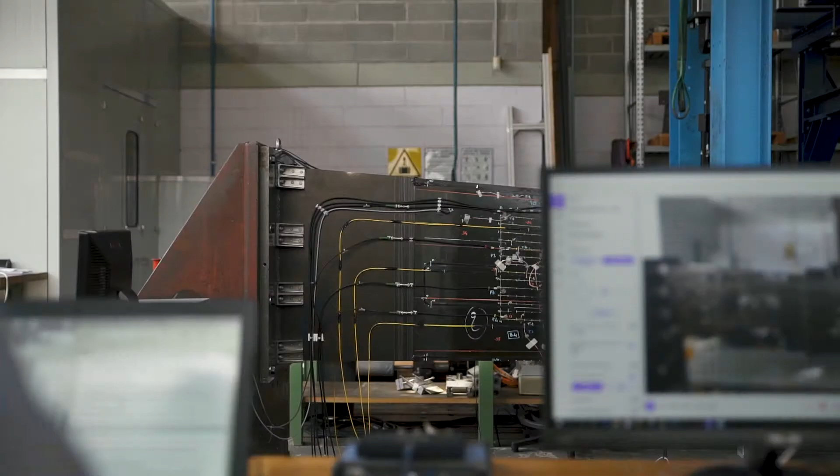SAMAS stands for SHM Application to Remotely Piloted Aircraft Systems, and it is aimed at the development and application of structural health monitoring methodologies with a particular focus on unmanned aerial vehicles. SAMAS is the third project in a row dedicated to SHM on aerial vehicles.

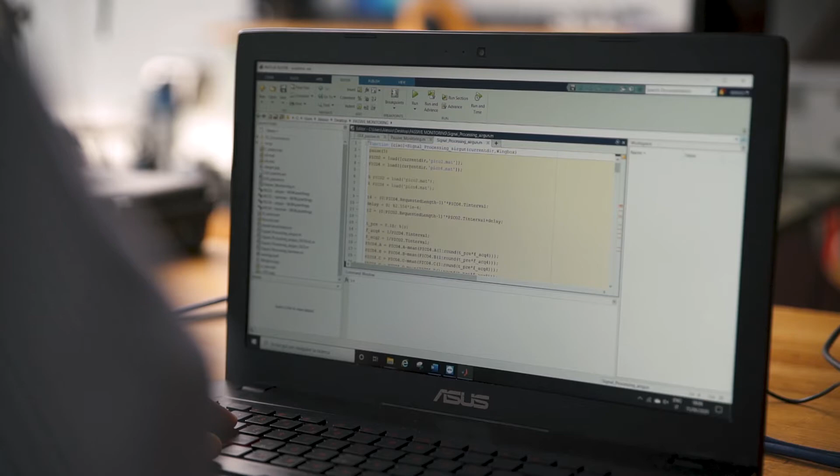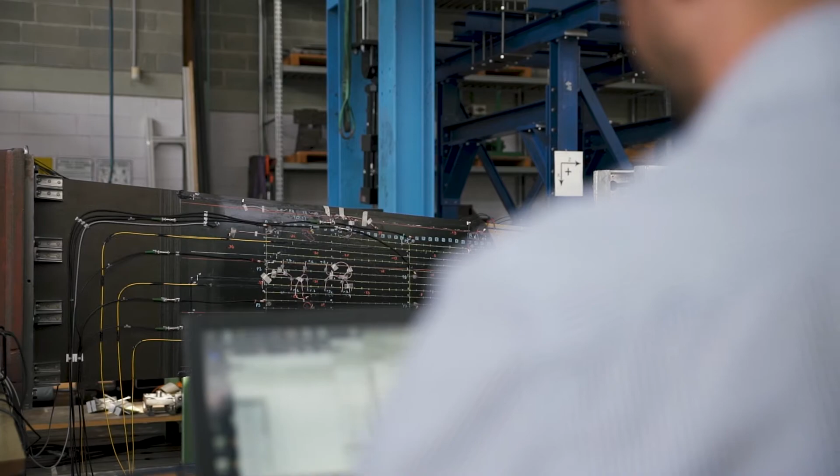Unmanned vehicles are one of the new realities our society and governments must care about. In fact, the European Commission asked for the development of technology enablers for the integration of the unmanned vehicle into non-segregated air traffic management. Among them, the development of SHM systems is a mandatory step.

The main objectives of the SAMAS project are, first of all, the realization of an efficient load monitoring system. The second point is the development of an impact monitoring system. And finally, the verification of SHM systems compliance with the currently available guidelines and recommendations, and the investigation of their beneficial effects on the vehicle life cycle cost through a cost-benefit analysis and a digital twin approach.

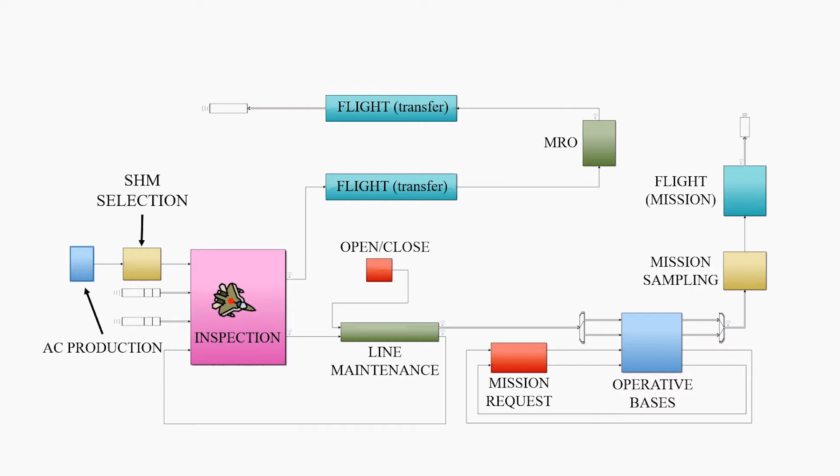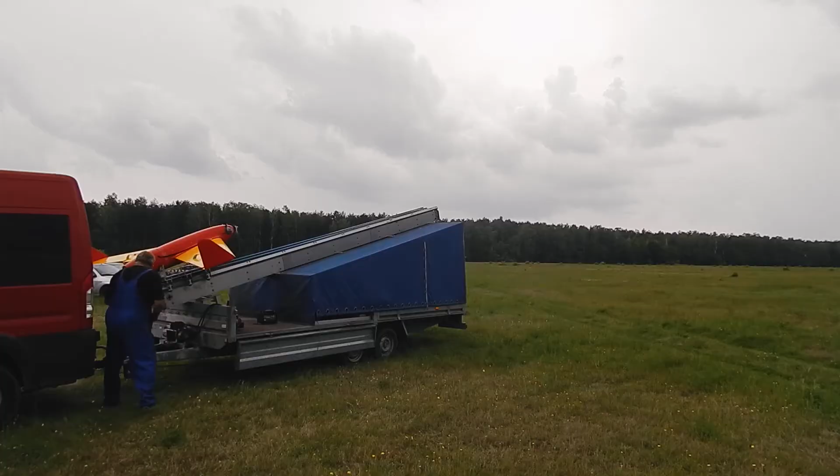At the end of the project, a demonstrator will show the operations of the load and impact monitoring systems, applying them to two structures or platforms. The first one is a carbon fiber wingbox portion in a laboratory environment. Then, a small-scale drone in a real environment executing flight tests.

An initial investigation was carried out to develop accurate and reliable virtual simulations. A mix between experimental tests and advanced nonlinear numerical models was used to calibrate and validate material models.

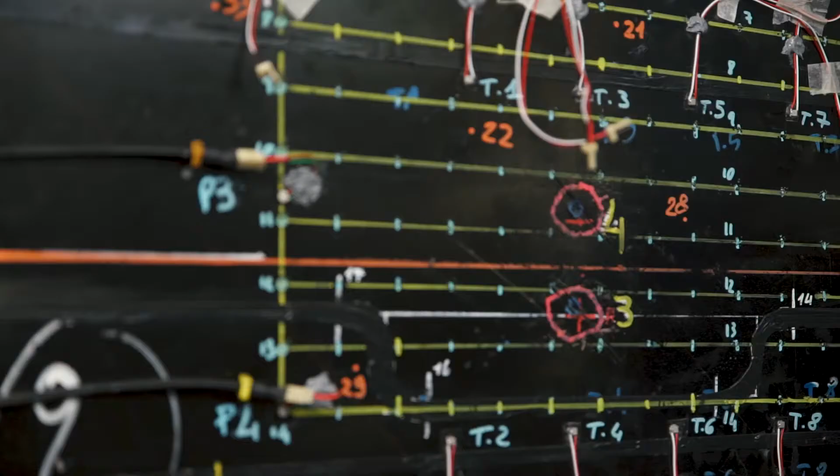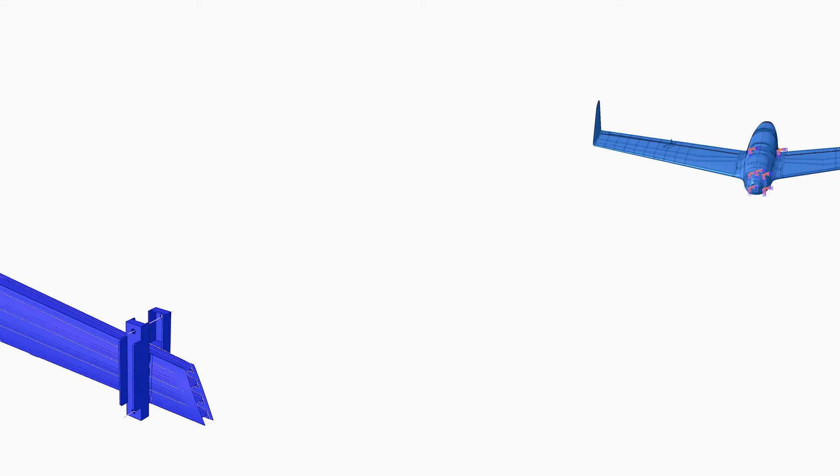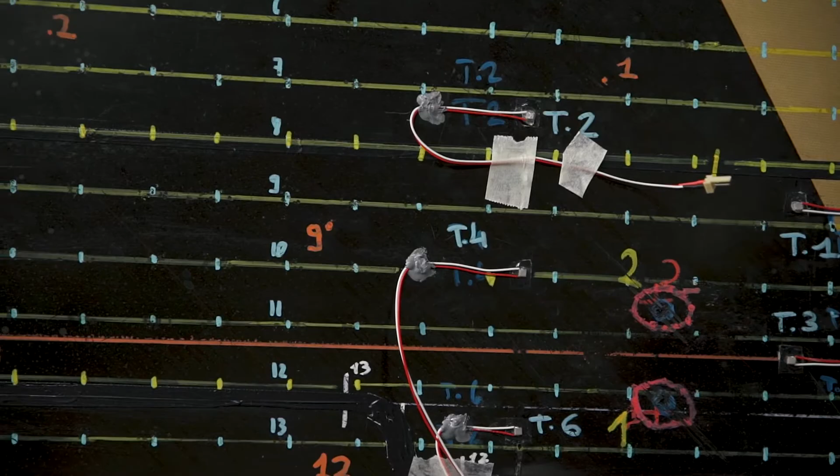The main objectives of the load monitoring system are life consumption estimation and maneuver recognition. These can be accomplished exploiting experimental measures and numerical models to provide an estimation of the aerodynamic loads and strain field during the flight. In fact, the two platforms were numerically modeled and the proper sensing technology was selected, choosing sensors based on optical sensing technologies for punctual and distributed strain measurements.

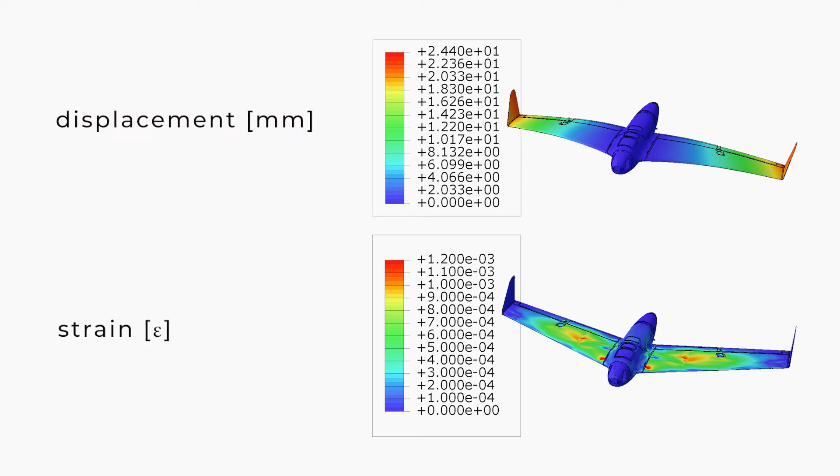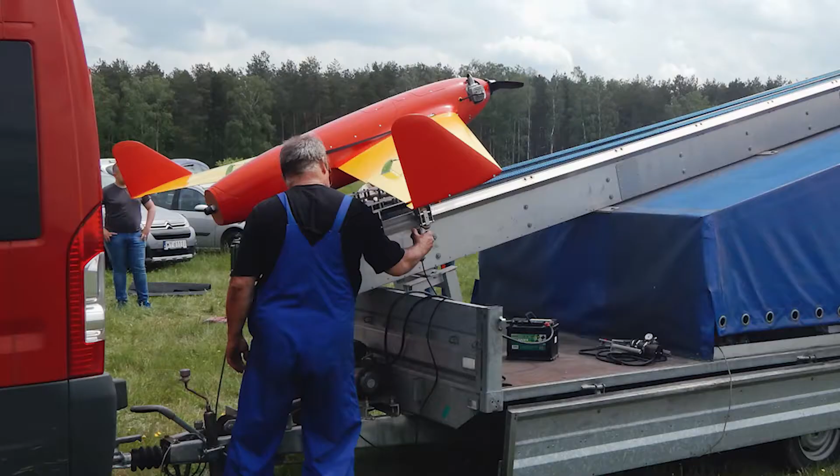The number and position of sensors and forces are defined through an optimization procedure. We studied the effect of static loads, engine vibrations, and temperature to obtain the best reconstruction performances. Finally, the sensors are installed on the real structure. The system operation is validated first in a controlled environment in our labs, then in a real environment through flight tests, acquiring data during the maneuvers with MIL-certified equipment mounted on board.

The system can reconstruct in real time a correct set of aerodynamic forces that induces in the structure a strain field coherent with the actual flying condition. The results are confirmed by strain gauges installed in specific validation positions and comparing the strain and displacement fields with those obtained with the computational fluid dynamic analysis.

The main objective of the impact monitoring system is to identify unexpected impacts and the related damages. A dual sensor network composed of piezoelectric elements and optical fibers acts in both a passive and active way to characterize the impact. We can divide the system into three parts: a passive impact monitoring, a numerical module, and finally an active damage monitoring.

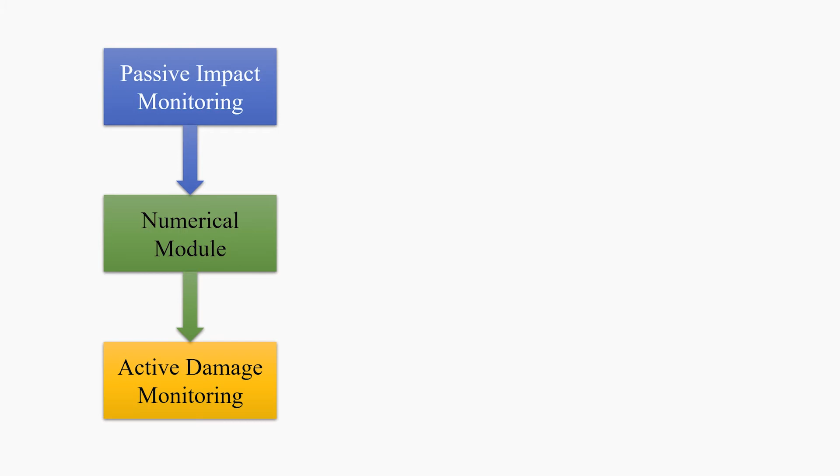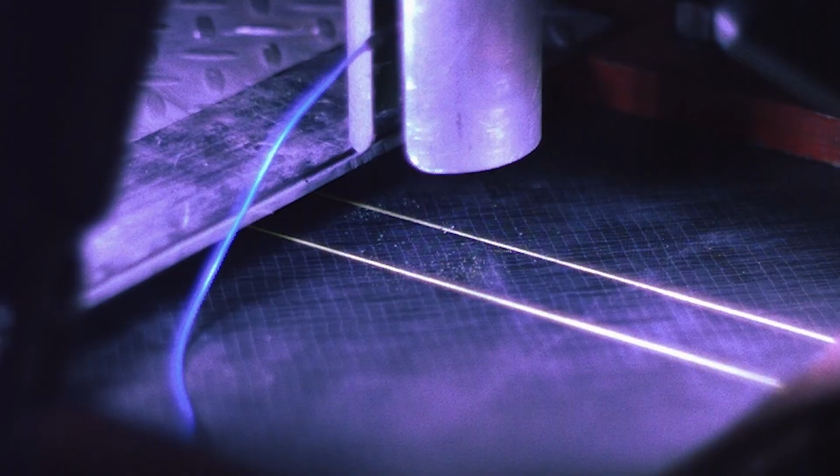An initial investigation was carried out to choose the sensor network optimal configuration, while the algorithms are trained with non-damaging impacts using a dynamometric hammer, then hitting the structure with falling masses, and finally shooting with projectiles. The damages are then measured with non-destructive techniques.

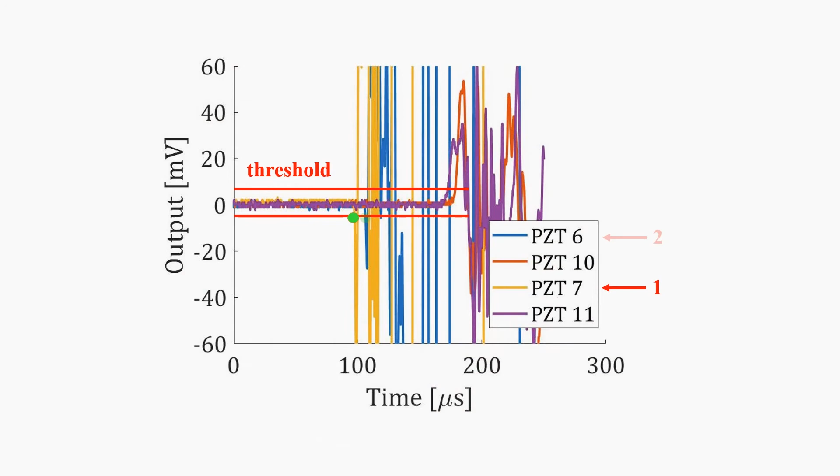The passive part detects, locates and reconstructs the impact force, exploiting data-driven techniques and genetic algorithms. The operation of the system is validated, comparing its result with the experimental information, showing its ability to fully characterize an impact event.

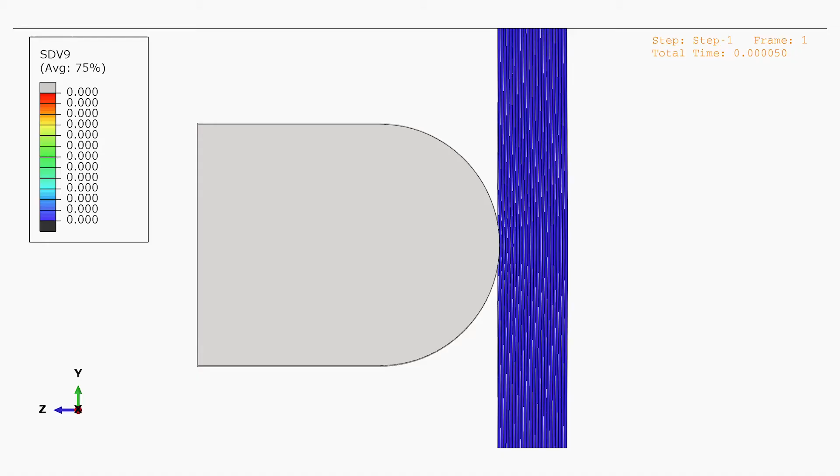Then, the numerical module gives an indication about the damage extension, leveraging on a building block approach for the simulation process to build a reliable and efficient virtual test environment that is able to mimic the behavior of the actual structure. The results are experimentally validated through a comparison with actual damage dimensions.

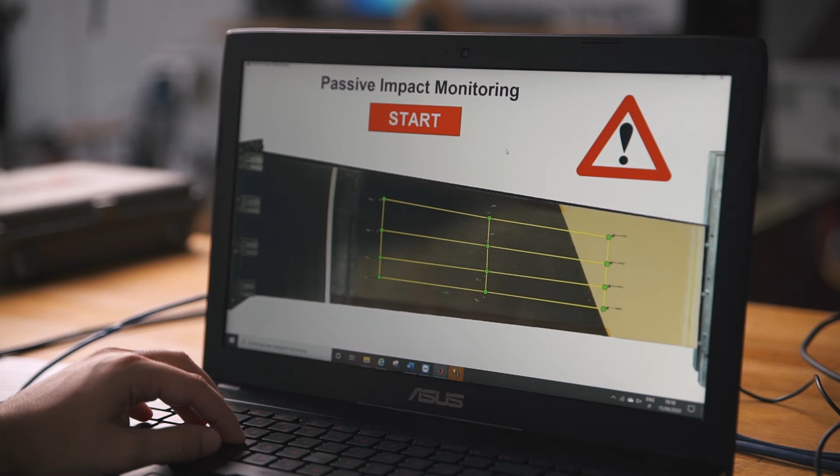The active part verifies the damage presence in the real structure. Piezoelectric elements excite ultrasonic waves that are used for the calculation of a damage index that is representative of the actual structural health state. Finally, we installed the system on the wingbox and validated its performances in real time, shooting the structure with projectiles.

We are confident that our project will contribute to implement this system directly in the real world.